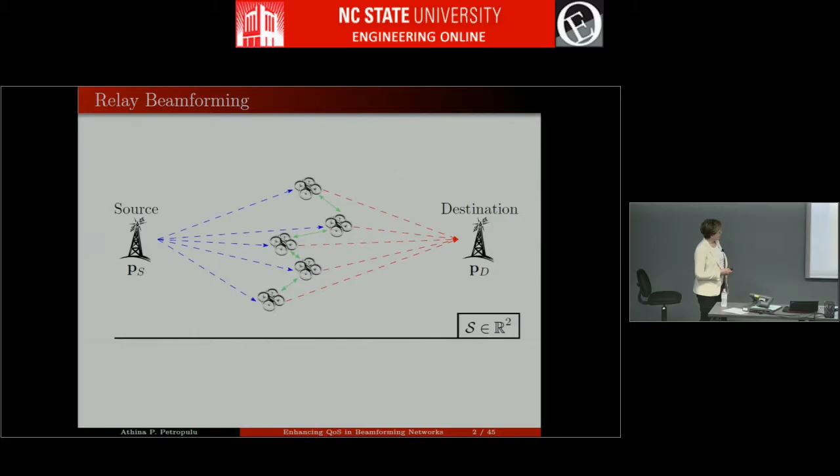Traditionally, this problem had been solved for static relays. The relays were wherever they were; you could select the relays, but they didn't have the ability to move. In recent work, we considered mobile relays. We know that the channel from the relays to the destination, or to the source, changes depending on the relay locations, so maybe some locations are better than others. If you knew the channel everywhere in time and space, maybe you could position your relays to the best possible positions. And if they're mobile, maybe you can send them to the best possible positions, and then they can transmit in an optimal fashion.

Maybe you're familiar with this on your cell phones: you're somewhere with very bad reception, and you move just a little bit and the reception improves. This means that reception can change significantly with small changes in your location. So these relays, if they can move and position themselves optimally, can really help the communication.

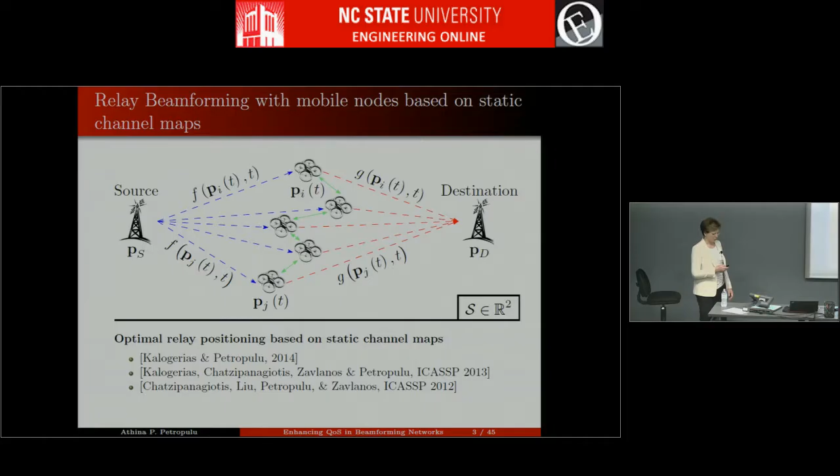However, there are some works that have explored correlations in the channel, how the channel changes in time and space. It turns out that there are channel correlations that can be exploited to predict the evolution of the channel in time and space. So you observe the channel here, and by extrapolating your knowledge about the channel statistics, you know what the channel will be in a particular location, and then you can go there. In this work, we will try to exploit that statistical information about the channels in order to optimally place the relays. The relays will only know the channel at the positions they have been to, and by extrapolating the channel, they will be able to predict the channel in time and space.

So where do I want to get to? Imagine this scenario: you have a source and a destination, and then you have a bunch of relays. It could be drones, it could be robots that can move, and they constantly move. They are controlled in an optimal fashion so that they go to the best possible location in order to facilitate this communication between the source and the destination. We're interested in maximizing the signal to interference plus noise ratio at the destination, subject to meeting some power constraints for the relays. So this is the problem that we want to solve.

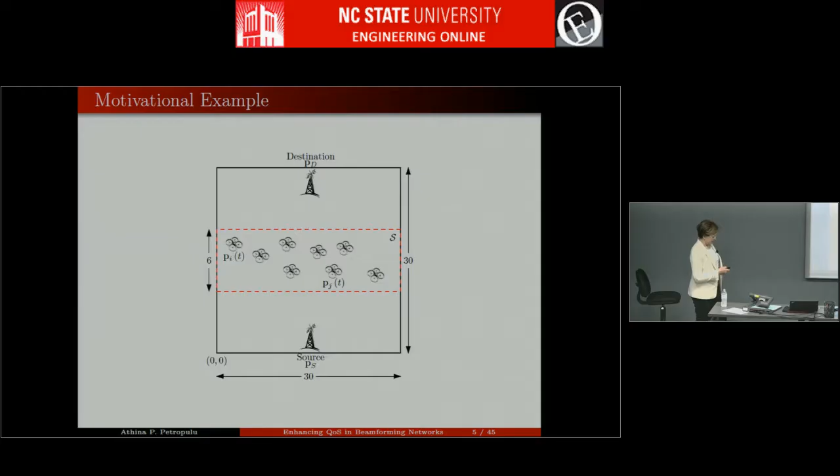Okay, so just to introduce the notation: we have the relays. P denotes the position of the relays, Pi denotes the position of the ith relay at time t. And we have the F channels - these are the source-relay channels - and the G channels - these are the relay-destination channels. They both depend on position and time, and will be assumed to be random processes. The F and G channels are random processes.

We have a network of capital R mobile relays. The channels are correlated in time and space. We will assume that channel state information is causal, as I said - meaning it's only known for the locations the relays have been to. They know the channel at the current time everywhere they have been to, so somehow at a given location they exchange the channel information, so every relay knows everything about that particular instant. But they don't know the future. The idea is that they will use statistical information to find that out.

So what I will present in this talk is a stochastic motion planning approach for mobile relay beamforming. The channel is a spatiotemporal stochastic field. It's going to be a two-stage optimization scheme for spatial relay control and beamforming, and we want to maximize the signal to interference plus noise ratio at the destination, subject to some power constraints. I will show that this problem can be nicely decoupled and solved at the relays - it has a nice distributed solution. So each relay will do a computation on its own and determine where to move next.

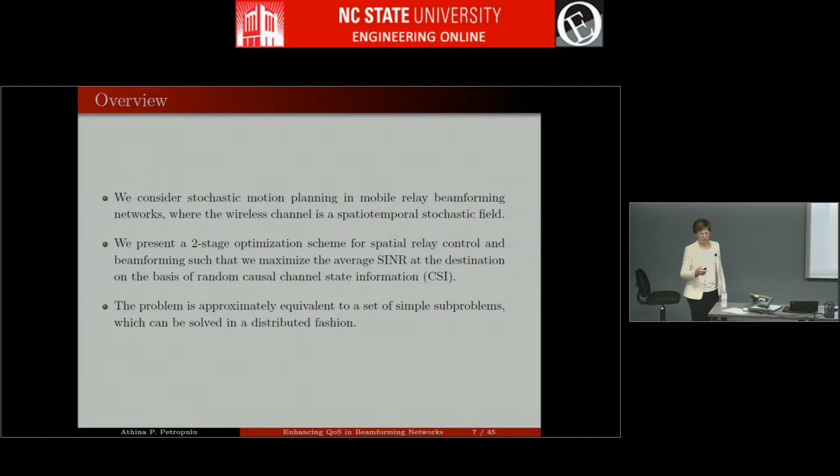You understand that everything I will present depends on the channel, on the statistics of the channel. So here is how we model the channel: we will consider flat fading. Flat fading is valid only for low bandwidth signals. If the signal has more bandwidth, maybe we can consider other types of signaling schemes, OFDM type of transmission, for example. But suppose the channel is flat fading, then it can be decomposed into three multiplicative terms.

The blue term is the path loss term - it shows how the power of a transmitted signal attenuates with distance. So P is the current location, PS is the source location, and L is the path loss exponent. Then we have the red term that represents shadowing, or large-scale fading, due to large obstacles that change relatively slowly in the propagation medium. And then we have the small-scale fading, the green term, that changes very fast - it causes very fast changes in the propagating signal. So we will model each term individually.

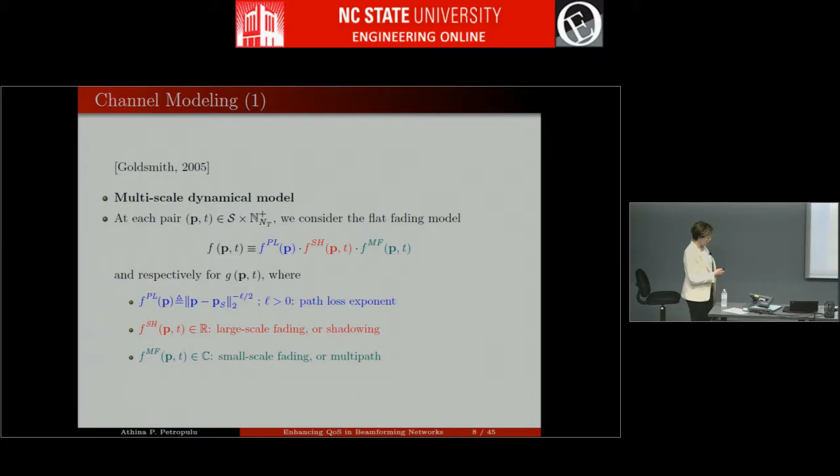Before we model the terms, we will take the log scale magnitude of the channel. So capital F is 10 times the log of the absolute value of F. Then the multiplication becomes addition, and we have three additive terms in the log magnitude channel: this is the attenuation term, this is the shadowing term, and this is the small scale fading term. Before defining this, from this term we will subtract its mean, so this term has zero mean. This is a model typically used in communications. So if I want to express this in terms of the absolute value of the fading defined before, this is the relationship - the magnitude of the fading is the exponential of the log of capital F.

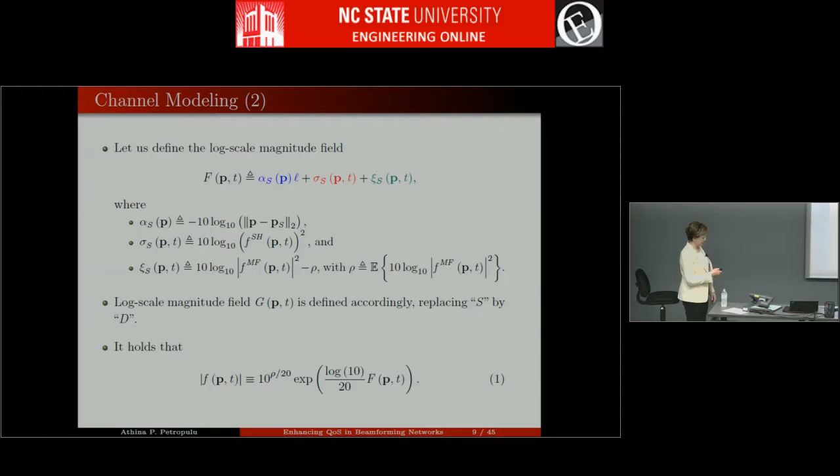Now these three additive terms are typically modeled like this. Both the small-scale fading and the shadowing are Gaussian, zero mean, with some variance. The small-scale fading term is IID.

There is no correlation in time and space. So I is the relay index, S is the source relay, D is the destination relay. The small-scale fading in all these relays is a white noise process, modeled as white noise. It changes so fast that it doesn't make sense to look for correlations in this component of the channel.

On the other hand, the shadowing term is correlated. Between different relays I and J, and between different times K and L, there is some correlation, described by this expression. It's like an exponentially decaying kernel, where Pi is the location of the ith relay, Pj is the location of the jth relay, at time K and L. It decays with the distance between the relays, and beta is the correlation distance. It also decays with the time between K and L, in this exponential fashion, and gamma is the correlation time. This first term was part of the Gudmundsson model. This term we introduced to model the correlation in time.

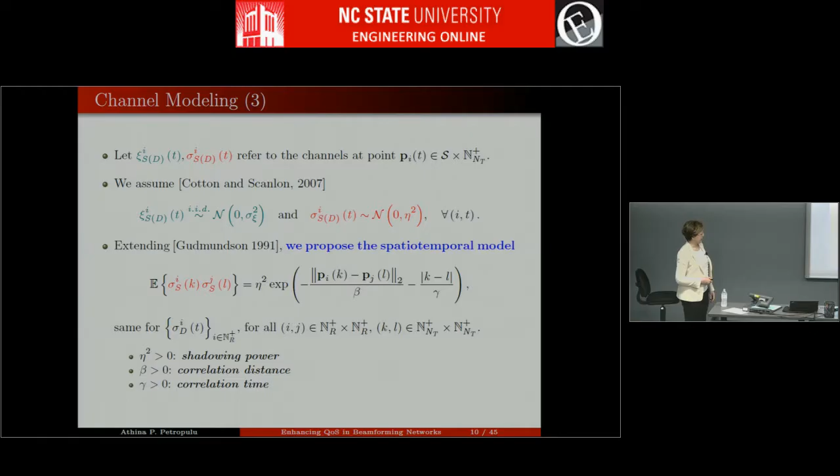Now there's one more correlation. This is for the source relays, for the shadowing term of the source relays. But we also modeled the correlations between the source and the destination relays in a similar fashion. We treated this correlation as if we were looking at the correlations of source relays times this exponentially decaying term, that decays with the distance between the source and the destination. The idea here is that if you have a source and destination that are far apart, maybe there is a physical obstacle that prevents the communication. If they are very close together, then the source and destination channels are definitely correlated because the relays are very close together. So it makes sense to model correlations between the source and destination relays somehow.

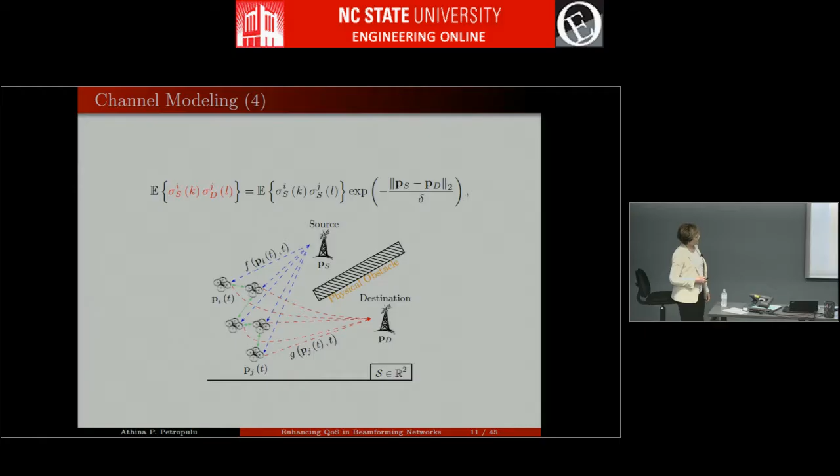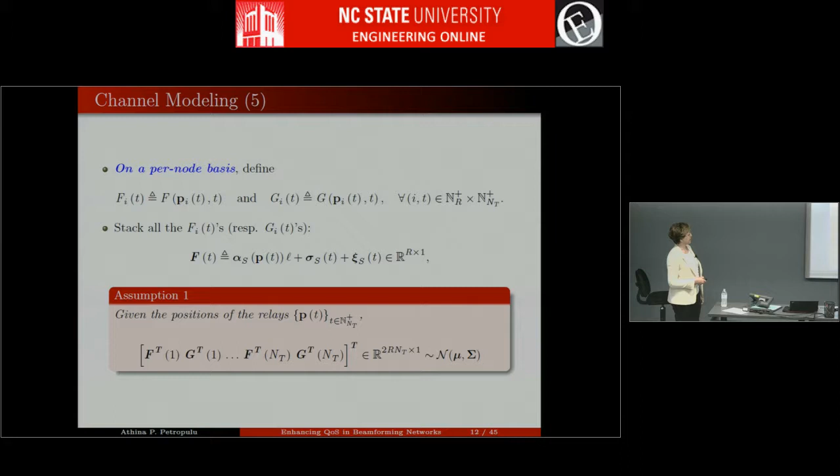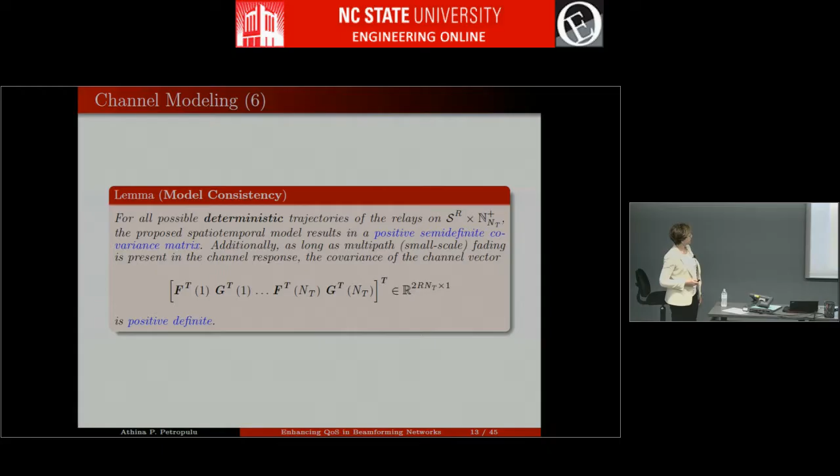Now, you can model correlations any way you want, but these correlations have to somehow work out. If you consider a covariance matrix, it has to be positive semi-definite or positive definite. So we showed that if you put all these log channels in this capital F matrix for all source relays, and in the capital G matrix for all the destination relays, and put them all in this long vector for different time instances, from 1 up to NT, discretizing time in slots, this long vector is Gaussian. They are all jointly Gaussian with some mean and covariance, which can be found based on the previous assumptions of these terms. We were able to show that the covariance is positive semi-definite, and if there is small-scale fading, if the variance of the small-scale fading is non-zero, then it's positive definite. This is good because at some point we're going to have to consider the inverse of that covariance matrix. So the assumptions are consistent, and we're moving on now that we established the channel model.

We're moving on with relay beamforming. So you have a source that transmits a signal S, and the relays hear it, amplify, and retransmit. This is what the destination hears, the signal, which will be the summation of NR terms, where NR is the number of relays. So it will hear the retransmissions of NR relays. Each transmission from the relay is the source signal after it has gone through the FI channel, then weighted by the weight, and then transmitted through the GI channel. This is the signal component that the destination receives. But it also receives noise, a weighted noise component from the relays, because it's an amplify and forward scenario. Even the noise at the relays is multiplied by these weights and goes through the G channels and is received at the destination. And of course, we have noise at the destination.

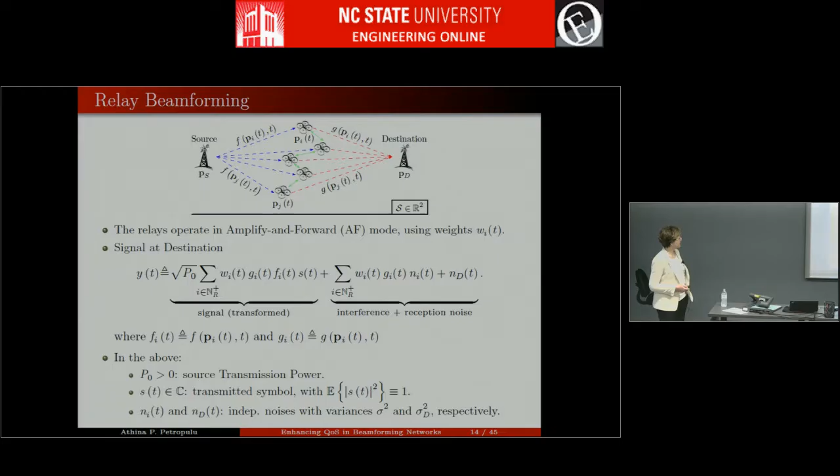We assume that the transmitted signals have unit power, and the noises at the relays and destination are independent. This is the signal to interference ratio at the destination. PS is the power of the signal component at the destination, and this is the power of the interference. So we want to maximize the SINR subject to meeting a power constraint at the relay, where PR is the power at the relays, and PC is some power budget.

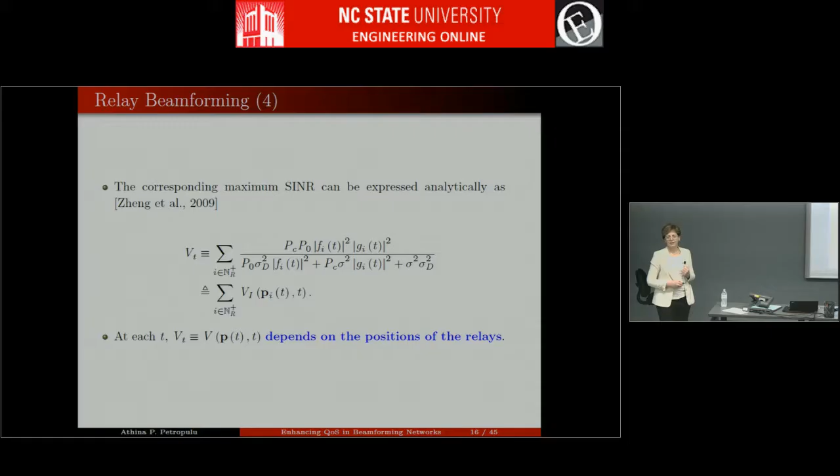So in a regular beamforming scenario, we would find the weights that give this maximum SINR. However, this dependence on position tells us that if we place the relays in the right position, we would get an even larger SINR. So this motivates the work to optimally place the locations.

What if a genie at some point, an oracle, at time instant t-1 tells you what is the best channel to go to? If you go there, then your SINR would be even larger, right? But there is no genie. How are we going to do that? We're going to exploit channel correlations to predict the channel and determine what is the best next location.

So here is how the scheme will work. We will consider a time-slotted system. There are NT time slots. So at the t-1 time slot, a source transmits a frame that contains information-bearing signal and pilots.

The destination also transmits pilots. The relays use these pilots to estimate the channels to the source and the destination at the current instant. Let's assume that they can estimate the channel perfectly. Then they will do beamforming, using the expression that I just told you. If they know the channels, they know the optimal weights, right?

They can do beamforming, and then they need a way to know where to move next. So they will be moving at the end of the slot. First they will beamform, and then they will move, so at the next slot they are optimally placed in order to beamform.

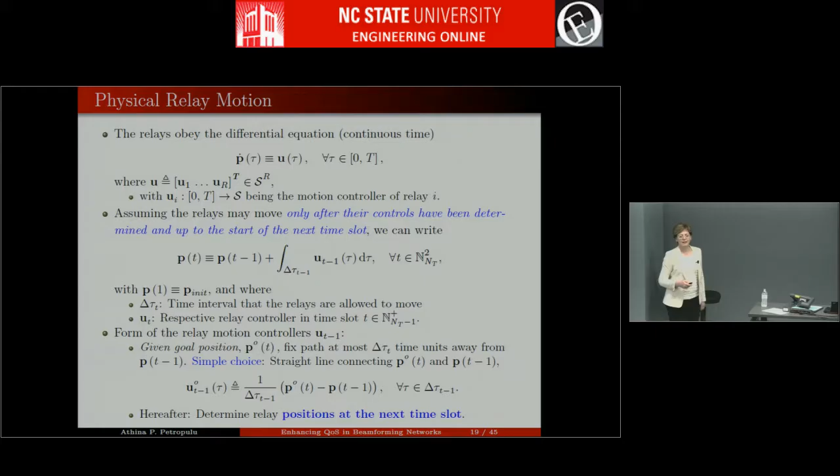Now we're going to talk about this optimal next location, how to find it. Before that, I want to emphasize that we're going to use causal CSI. What does this mean?

Consider this C of t. I will use C of t to denote the CSI that has been revealed to the relays along their paths. So at time t, the relays know the relay positions, P1 up to P sub t, and they know the channels up to that time for all these positions. This is the C of t. So as they move on, they keep adding terms in the positions they have visited and the channels that they have seen.

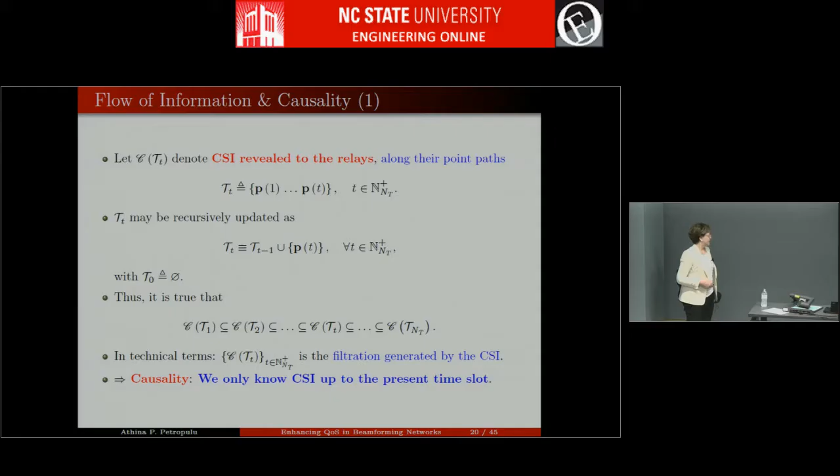Whatever we're going to use, it will only use causal CSI. So we propose a stochastic optimization approach. We're going to maximize the SINR on the average, and this maximization will tell us what is the optimum location to go to, right?

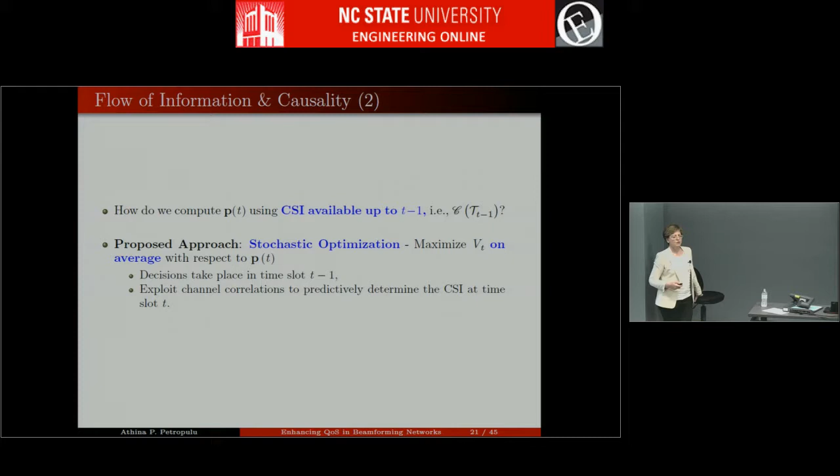So this is a problem that we will try to solve. We want to maximize the expected value of this SINR with respect to the next position, P of t. And we want to do that by exploiting channel information that was available at t-1, because this problem will be solved at t-1. So we want to find P of t as a function of the channels that have been revealed to us up to time t-1. The next position will be in the neighborhood of the previous optimal position. I guess that's about it.

So there are some assumptions on this C function that I will discuss next. This is a stochastic optimization problem because P of t is random, right? How do we deal with such a problem?

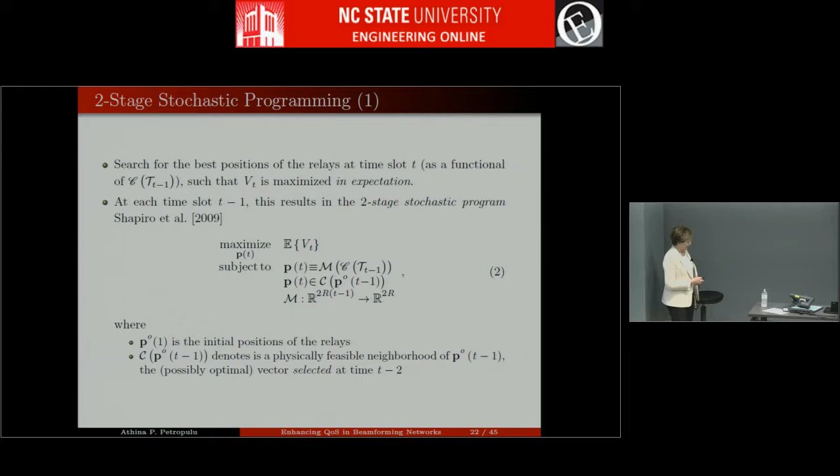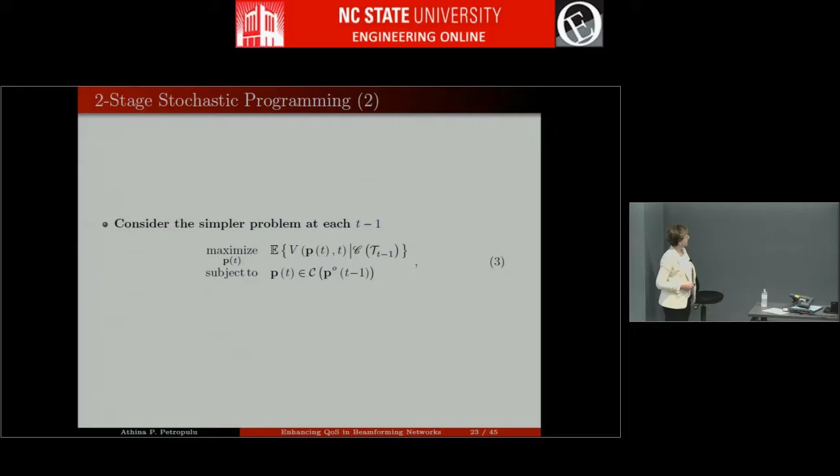How about if we consider a slightly different problem? Instead of taking the expected value of V of t, let me consider the expected value of V conditioned on the channels that were available up to t-1. And I want to maximize it with respect to P of t. This is an easier problem because P of t now is deterministic, right? Because conditioned on these channels, I know P of t deterministically. So how is this problem related to the original problem?

Well, if we use the fundamental lemma of stochastic control under certain conditions, the FLSC tells us that the problem we want to maximize, the expected value of V of t, can be written as the expected value of the maximum of this conditional expectation. So this is the problem that I had in the previous slide.

This is an easier problem because it's conditioned on these channels, in which case P, the variable of maximization, is fixed, is deterministic. But of course, what's going to come out of this maximization will be random. So we need to take another expected value. The fundamental lemma of stochastic control allows us to change the order of the maximization and the expectation. And it holds under certain conditions.

The conditions basically have to do with the form of this V function. It has to be a Caratheodory function. And it depends on this C, the neighborhood of the previous position, which has to satisfy certain conditions—it has to be a multifunction. I can give you more details if you're interested, in the paper, I can send you the paper. But these are very mild conditions—basically that this is like a neighborhood that follows the relays as they move in space, and that V is a measurable function.

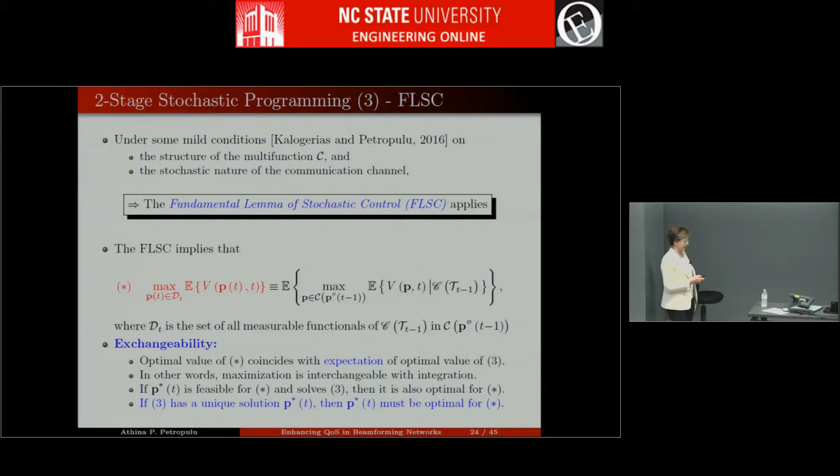So if we look at this inner maximization problem, it can be expressed as the sum of conditional expectations, and the sum runs over i from 1 up to nr, the number of relays, subject to P of t being in the neighborhood of the previous relay position. This is a nice separable problem—you can see that each term here can be computed at each relay individually. So we have a naturally distributed, separable problem with a naturally distributed solution.

Each relay will maximize this problem. They will maximize the conditional expectation subject to the channels that have been revealed to them up to the current time point, subject to the fact that the next position must be in the neighborhood of the previous one. So this problem will be solved at t-1.

So backtracking, we have a slotted system. In the beginning of the slot, the relays estimate channels, they beamform, and then they solve this problem that will tell them what location they need to move to. So they move there—we have the control that will send them there—and then at the next time slot, they're optimally positioned to beamform. And because they are in the best possible positions, the SNR that they will achieve will be the maximum possible. So this is the idea.

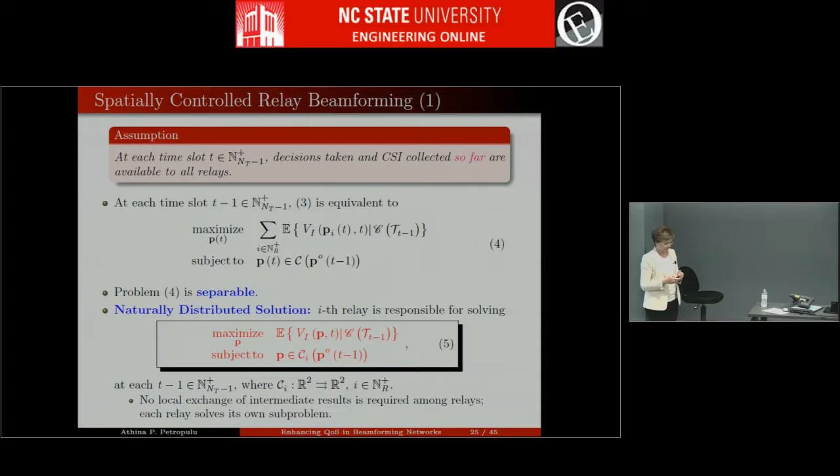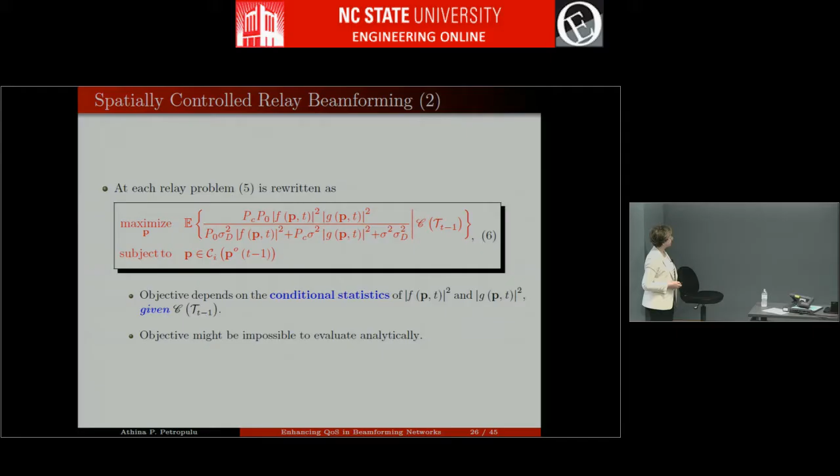Now, if we look at the problem each relay has to solve, it is of this form. We want to maximize the expected value of such a term. It has magnitudes of the source and destination channels at the current instance, conditioned on the channels they have visited up to that point. So the objective function here depends on conditional statistics of the magnitudes of the channels. It's difficult to compute them analytically, but we can do some approximations.

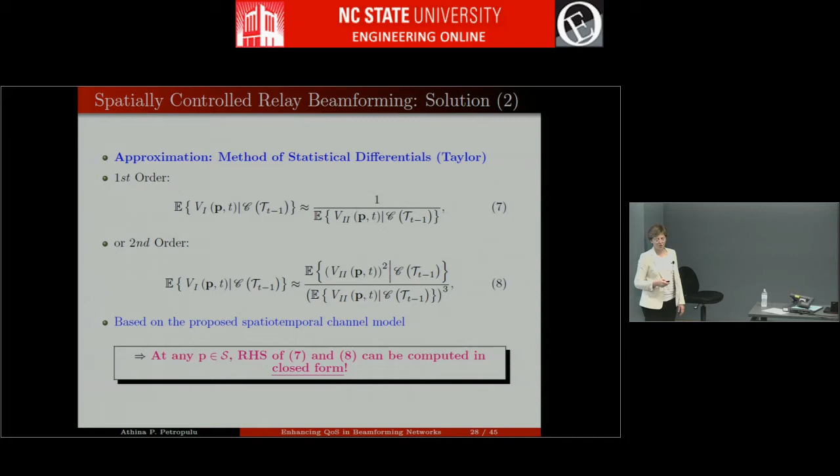And I'll give you some idea how they can be computed. For example, if we take the second-order approximation, in order to maximize this, we can use nonlinear optimization methods.

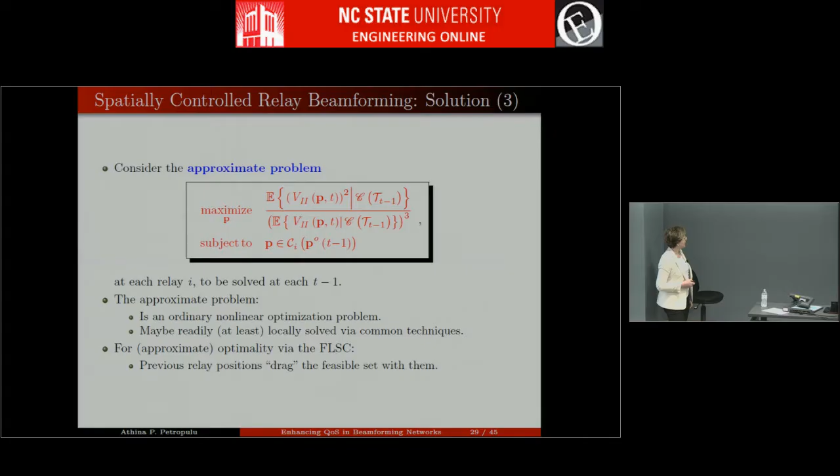So to look at the expressions that we need to maximize, they all depend on this kind of statistics, joint statistics of order m and n of the magnitude of the channels. And because we did the assumptions on the log magnitude of the channels and the capital F and G, we can change this in terms of capital F and G.

We said that this vector is jointly Gaussian. And if you look at this expression, it looks like the joint moment generating function of F and G at m and n, conditional, right? Conditional. The joint moment generating function of a Gaussian vector is known. It has a known expression, right? So this is the expression.

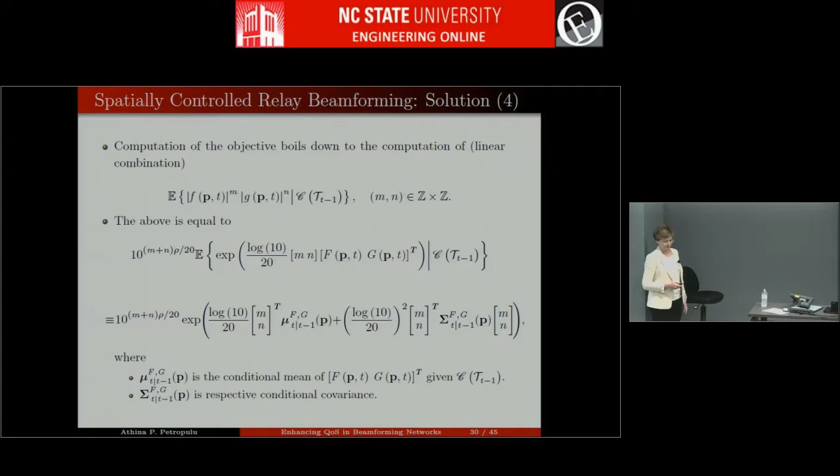This is the conditional mean, and this is the conditional covariance. So we can obtain all these terms in closed form. And I can give you the expressions, but I mean, it's straightforward to find them. The interesting thing is that they involve the inverse of the covariance matrix. We know that the inverse exists.

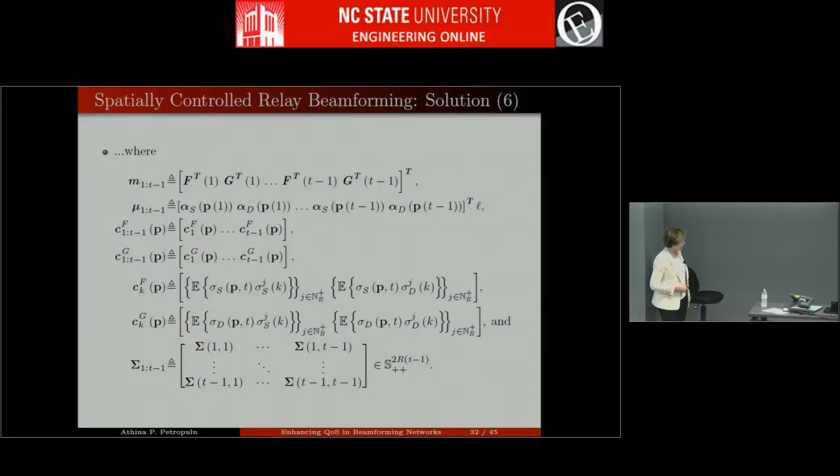The issue with this covariance matrix is that it keeps increasing as time goes by. So it has elements from 1 up to t minus 1. So as you keep going on, it gets bigger. So finding the inverse looks like it's a computationally intensive task. But we can assume that the correlations sort of decay with time, so we can use a window to limit the size of this covariance matrix.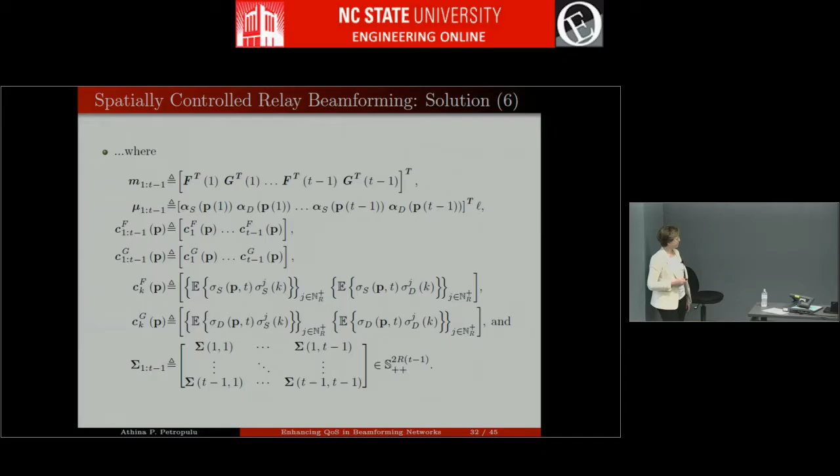We can also use the matrix inversion lemma to reduce a little bit the computations involved for the inversion. So if I invert the matrix directly, I have capital R relays. The complexity is R cubed, t to the third. T is the time instance. While if I use the matrix inversion lemma, then instead of t cubed, I will have t squared. So a little bit computational savings.

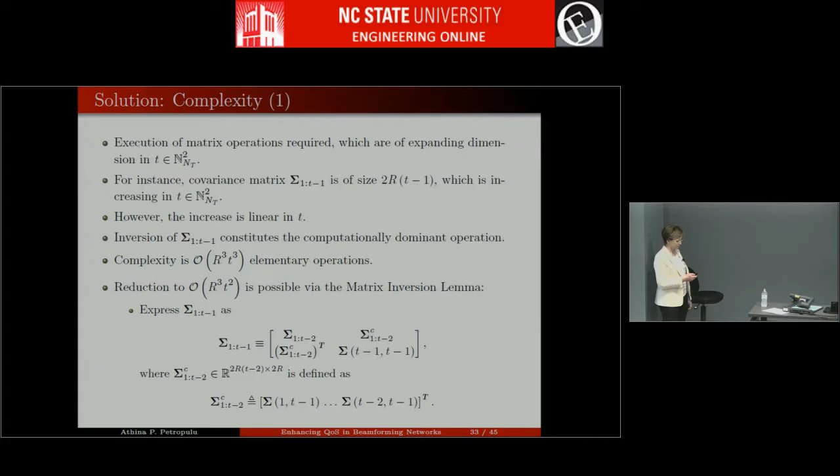We have also shown that under mild conditions, the average SINR that we achieve increases across time slots. And it's a very interesting result. We have shown that if there is sufficiently large correlation, then the average SINR does not change even if you don't move. That's what this says. It says that the position will be the same at t minus 1 and t.

So if suddenly you stop moving, the maximum SNR will not change on the average. The same thing will hold if some relays stop moving. They keep communicating, but they stop moving because maybe they experienced failure, they ran out of power, of gas. So if some stop moving, the maximum SNR will not be affected. It will stay approximately the same.

We have also shown that the maximum SNR on the average either stays the same or increases. It never decreases. That's what this says, as time goes by. So as time goes by, it plateaus to a certain value.

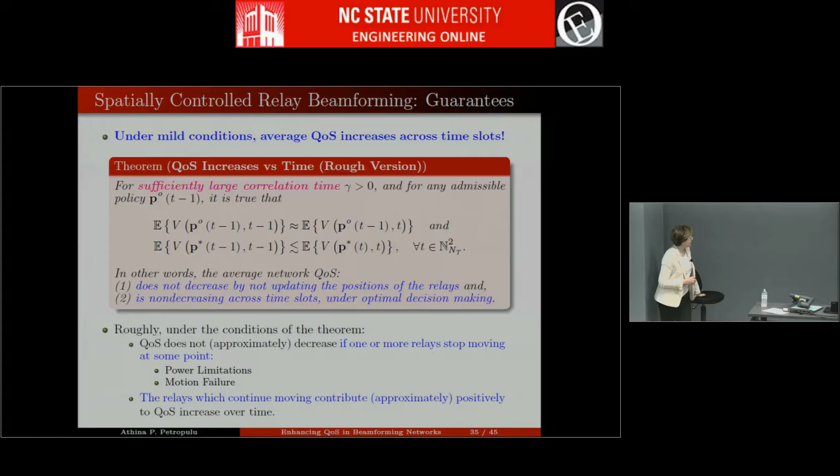I'm not going to go over the proofs for this, but I'm going to show you some results just to highlight the ideas. So I will use this scenario that I explained in the beginning. We have a 30 by 30 meter scenario here, a source and a destination, and 8 relays that can move. And the relays move within a square around them. So they can move either up, down, left, right, and diagonally.

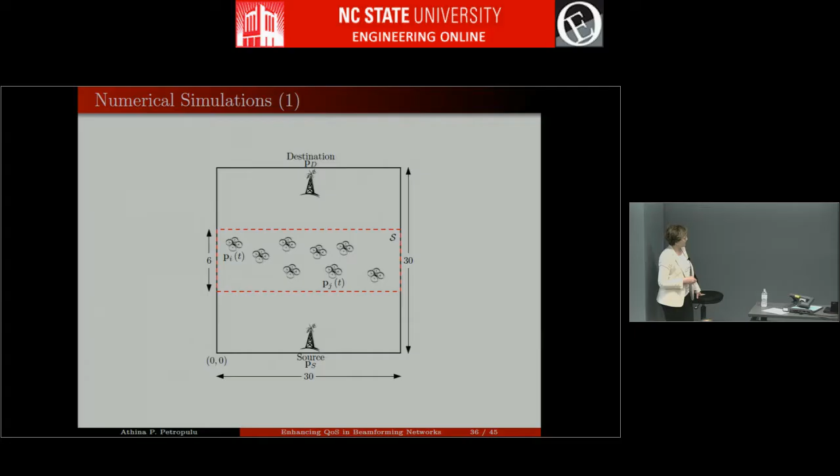So we put a grid on this space, a 30 by 30 grid that we fit on this scenario. We use these kind of parameters here that are sort of realistic of a wireless communication scenario. We implement basic collision control. We want to make sure that the relays will not bump into each other and will not get out of the boundaries.

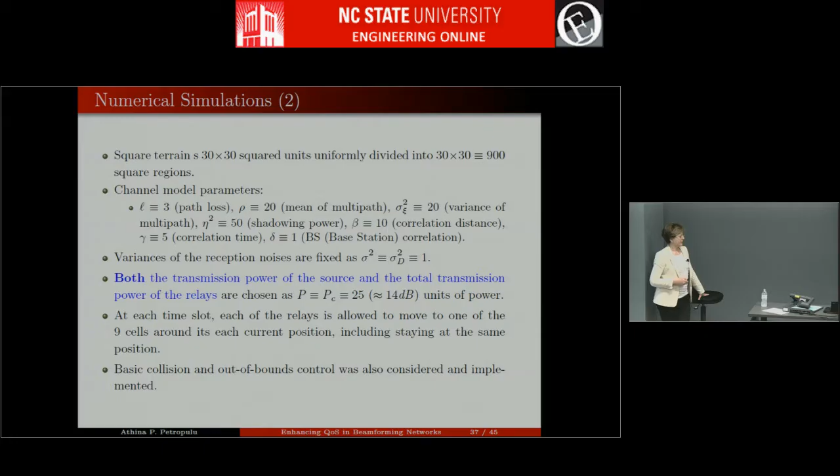And here are some results. We did 4,000 Monte Carlo runs. And this is the expected SINR. This is time slot. And this line corresponds to agnostic movement of the relays. So the relays randomly move. They have no goal. They just keep moving in a random fashion.

This is the standard deviation, just to give you an idea, because we optimize the SNR on the average, since the position is random. So the best we can do is optimize the SNR on average. This is the standard deviation during the 4,000 iterations of the agnostic scheme, this is the standard deviation of the proposed scheme, and this is the standard deviation of the non-achievable perfect case. So there is a high standard deviation introduced by the channel, because the channel is a random process and keeps varying.

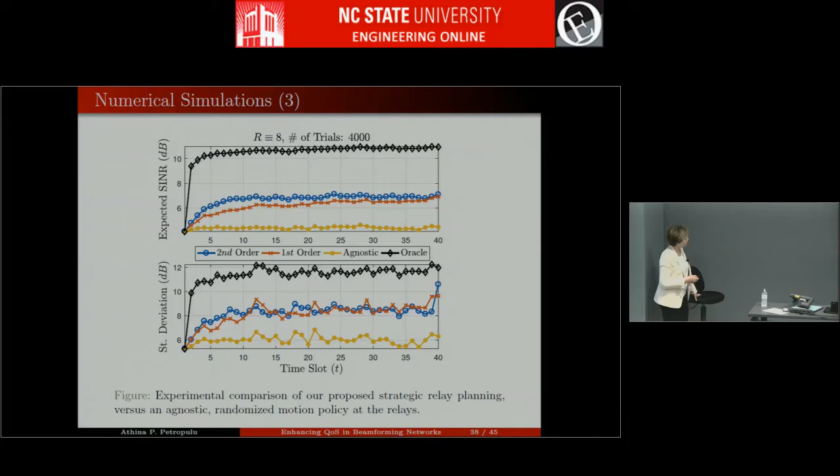The result that showed there will be no drop assumes very strong correlation. The gamma for this case is 5. I'm going to show you next results where I use a higher gamma, and you'll see a much smaller drop.

In this case, the failures start happening in this neighborhood, around 12 and 15 time slot, so the SNR was already high and it was maintained at that level. In this other case, the failures start happening earlier, between 5 and 6 slot, so wherever that SNR had been achieved, it's sort of maintained.

So this is the case of five failures, and this is the case of no failures. Now this is a scenario with stronger time correlation. You can see the effect of some relays failing is much smaller. It always depends on at what time instant the relays failed. If they fail later in time, where a high value has already been achieved, there is no significant impact. If the failure happens early on, there might be an effect depending on how many relays fail.

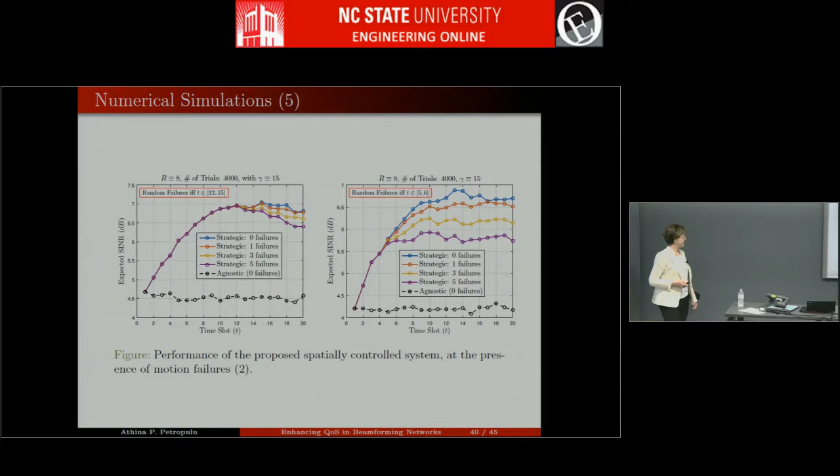So where do we go next with this kind of work? What other applications can we consider? One potential application is controlling mobile jammers for physical layer security. This is another field that my group has been doing work on. Is anybody familiar with physical layer security in this audience? Okay, so it's a very interesting area.

Traditionally, security is ensured using cryptographic approaches, done at the higher network layers. But it turns out you can ensure security even if an eavesdropper knows the cryptographic codes you're using, by exploiting the characteristics of the wireless medium. So if you have a source and a destination, and some eavesdroppers trying to intercept what you want to send, there is a theory of secrecy rate: the rate that the destination will receive minus the rate the eavesdropper will get. Obviously, you want to maintain a positive secrecy rate.

There's a theory that says if the channel to the destination is worse than the channel to the eavesdropper, you cannot guarantee positive secrecy rate. So there have been works to ensure you can sustain positive secrecy rate even if this channel is worse than the channel to the eavesdropper. Techniques to do that use multiple antennas or cooperative jamming. So you have a bunch of relays that, while the source is transmitting, transmit noise, making sure the noise will not interfere with the destination. In this way, they corrupt the channel to the eavesdropper, creating the opportunity for a positive secrecy rate.

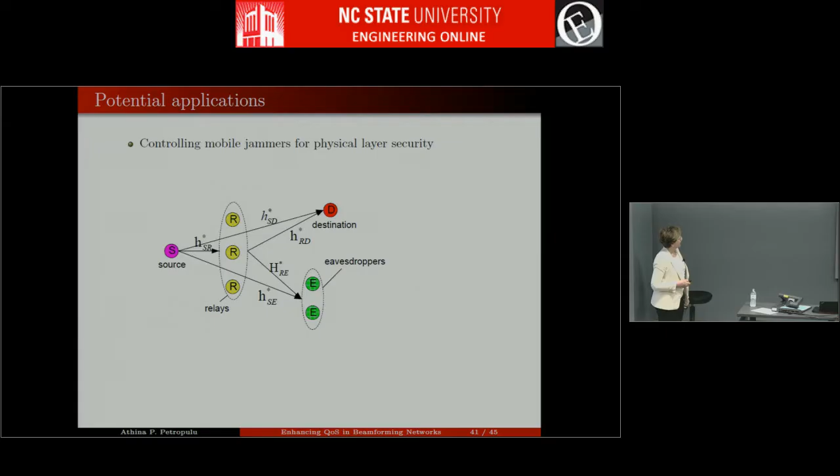So a natural application of what I presented would be in this scenario, because it does matter where you place the relays in order to have the maximum effect on the eavesdroppers. As a next step, we're looking into this problem when the relays are mobile.

Another application could be a physically reconfigurable antenna. Suppose the relays are not completely mobile; they have certain ways they can move, for example on a grid, left, right, back and forth. You have this grid antenna, and these elements move left, right, back and forth in order to optimize the communication. For example, you could deploy such an antenna on the wall of a building to help your cell phone when you don't have good reception.

I'm not saying that such a thing exists, but it could be a nice application of our work. Of course, another idea would be to have antennas at all possible grid points and activate some antennas at a time. But that would require more hardware, right?

Here you can do with a few nodes that can move around left and right. So this could also be drones that are moving between the source and the destination, helping the communication, and so on.

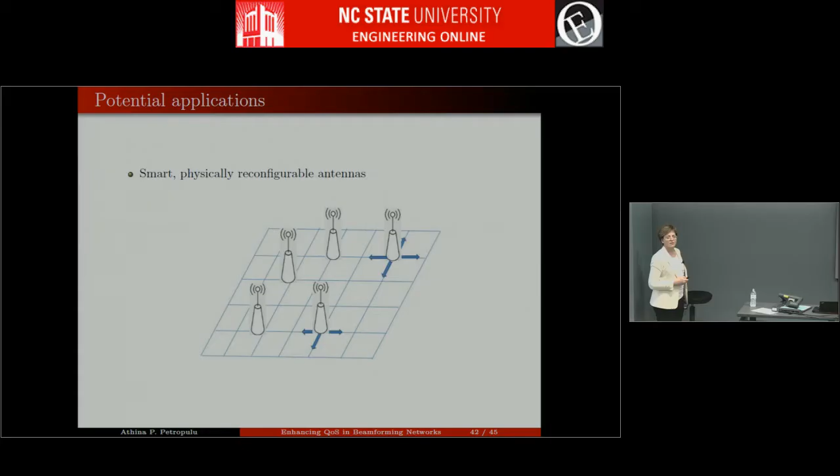To conclude, we considered the stochastic motion planning problem in amplify-and-forward relay networks. We formulated a two-stage stochastic programming problem in order to find the optimal relay positions at each time slot, so that the average SINR is maximized using only causal channel state information. We showed that the problem can be naturally decomposed into a set of problems that can be solved at each relay in a distributed fashion.

Topics for further research on this theoretical problem involve physical constraints on the relays. I didn't take into account in what I presented the gas that the relays will use, or the battery that they will use, or how fast they can move. All these are issues that need to be taken into account.

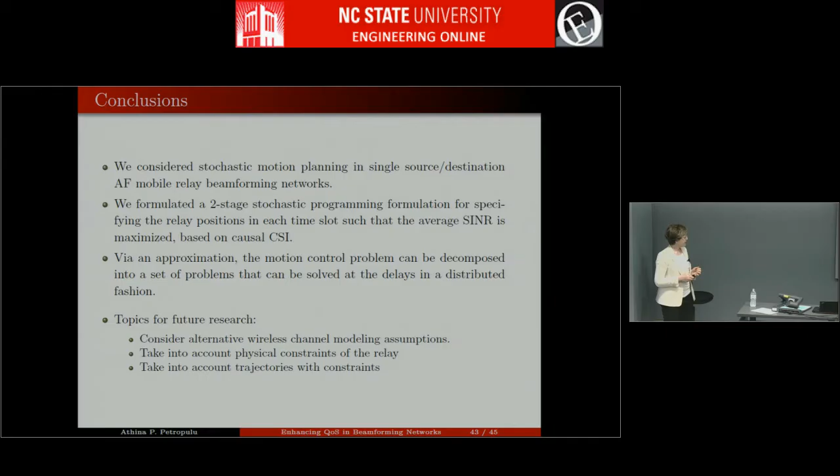Thank you very much for your attention.

I'll start with some questions. So I recall that you have a theory saying that if the correlation time is sufficiently long, then the quality will not decrease, right?

Yeah. So two questions. One is, during this adaptation process, can you show that they will converge at some point, or will they just continue improving? We saw that it's a non-decreasing process. It's a non-decreasing process, but in our experience it stabilizes, it plateaus after some point.

So as time goes by, it hits a plateau. Yes, maybe a local point. We have not shown that there is such a point, but we have shown that it's a non-decreasing function.

And another related question is, if the correlation time is not so large, will there be some conflict between these two? You'll start improving, but then exactly. So yes, this is a very good question, it's a very good point. In order to predict, you need to have some correlation, right?

And obviously there's some time horizon over which you need to move. So there has to be a balance between the two. You have to take both into account.